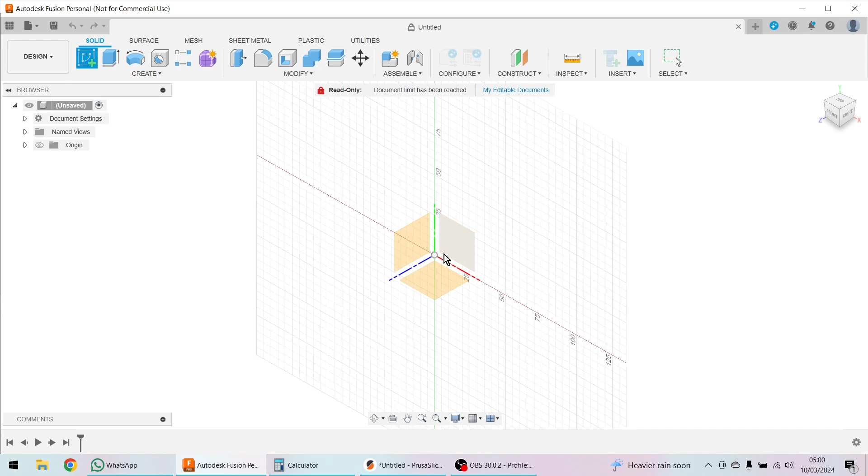Right then, Chris, so you're in Fusion 360 and you're going to create a sketch. I always use this one, personal preference. You can use the others, and if you choose a different one than this, it'll actually be the right way up when you put it on the bed of the slicer without reorientating. But it's all a learning curve, so we'll do this and reorientate it on the PrusaSlicer also. I'm going to click here.

For those watching who don't know, he's got a pipe coming along in this direction which he needs to slide into his part, and he's got a wire tie for activating the guns coming through here. What he needs to do is create an arc here, so the wire tie follows the arc when it's being pushed by a servo over here.

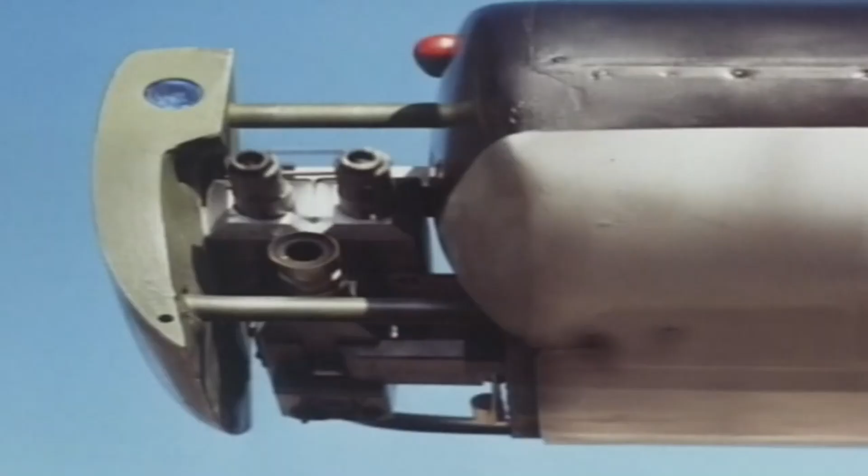So without further ado, let's go here, and we're going to create, just using arbitrary values here, guys, because we don't know the exact size of the part, and this is a learning curve. I want Chris to measure everything up and make these bits perfect. So we're going to go for 50, an arbitrary value here.

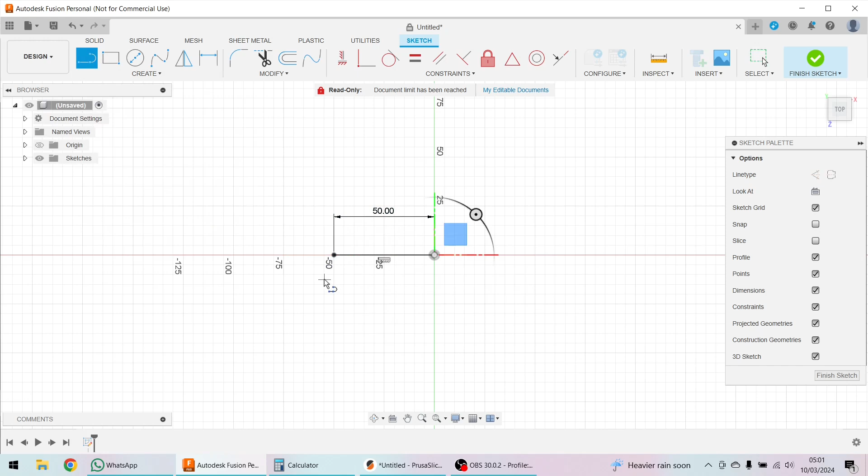I'm going to slide that up here. We're going to click on this bit now, and the pipe's coming here, and I know it's around about, let's say, a 10mm pipe. So I need at least 12mm coming down here, so I've got a millimeter on each side of the pipe, which is going to be pushed through here or down here to an end stop.

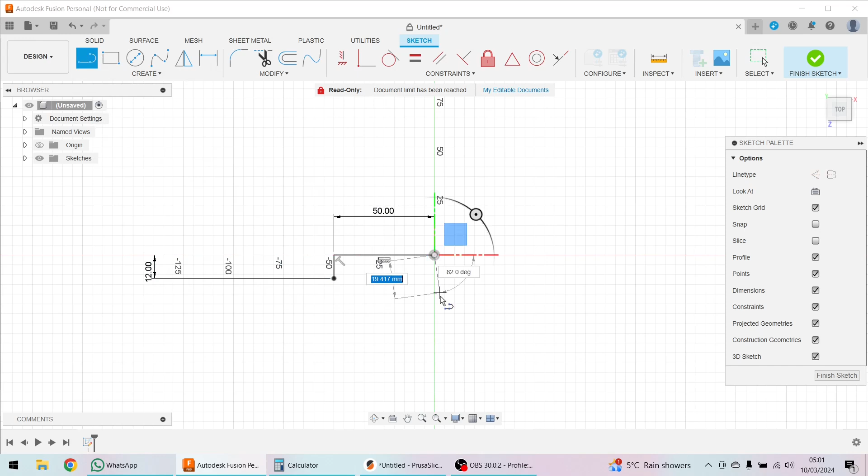Now this bit needs to be a curve. I'll just drag that out of the way so we can see it. If I press the line again, up here, over here, and down here, let's say this is going to be 45. I'm going to type 45 and press enter. Drag this out here so it's out of the way.

Now we're going to put a little bit of an arbitrary value in here. Let's say we need to raise it out by 5mm. Hit 5, press enter. Drag that out there so we can see what we're doing.

Now we need to create an arc here for the wire tie to be pushed around. So let's create an arc, and we'll use a 3-point arc here. We'll put our first cursor here, click, and click here, and then we will make our arc. Let's say we want it to be slightly offset over here like this. We'll click there and we've got an arc.

Now notice I'm going to press the escape key here. Notice how this is a blue line, which means unconstrained - it doesn't know the value of the arc. So I'm going to press D for dimensions.

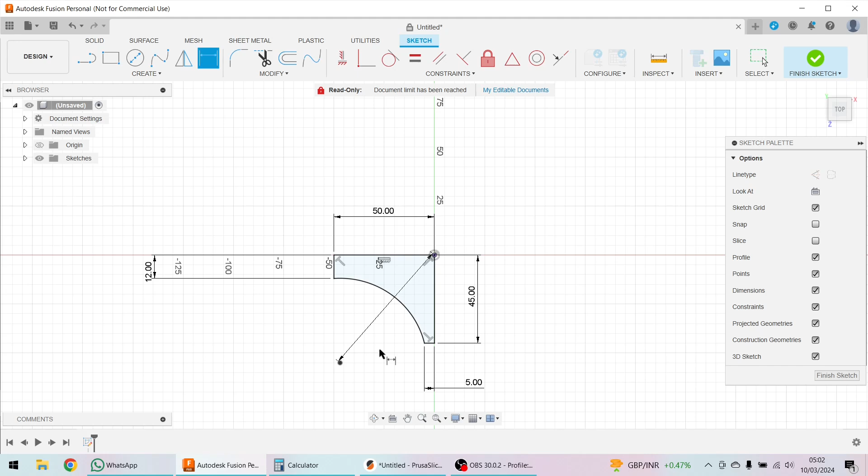I'm going to click on this dot here, and click on this dot here. I'm going to put a dimension in there, and I'll call it 72. Hit enter. Now notice we don't really know what this arc should be, because at the moment there's no arc there, and as the wire tie pushes along this, it sometimes wants to go down here and get stuck.

So the idea of this part is something to guide the wire tie round, and the Airwolf guns come out down here. So the servo pushes the wire tie down here, which pushes the guns out down into this direction.

So that's about right. If I press escape to get rid of the dimensions cursor on the screen, I can double click here, and we can just alter that to 70 maybe, and change the orientation of this arc. If we really need to change it completely, we could...

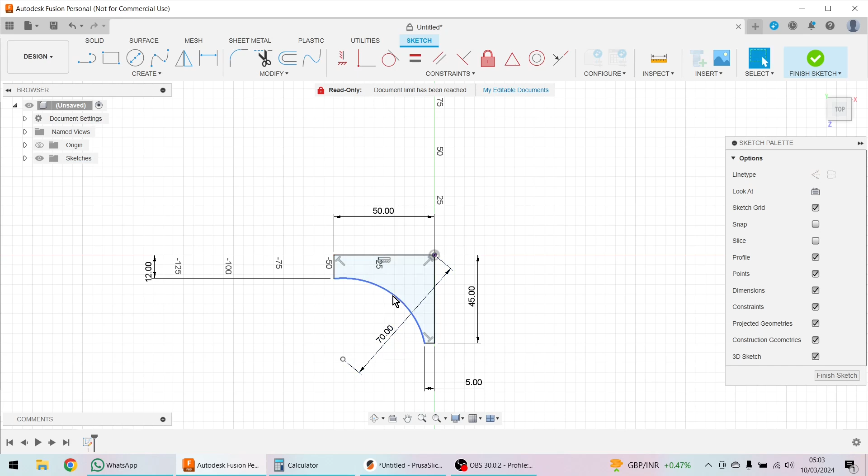Left click there, hit the delete key, and create a new arc. Let's say we put a new arc down here, and we could make it go maybe down more, down this sort of area down here maybe. So it all depends on how you need that arc to be, and that'll be for Chris to play about with.

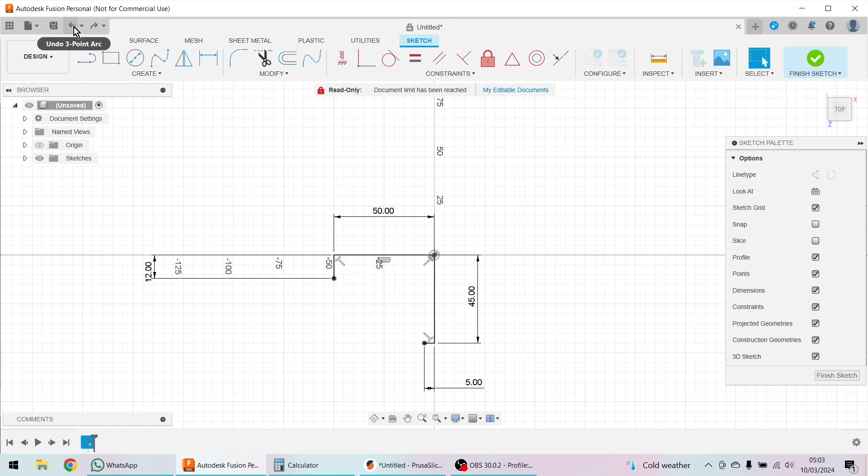For now though, I'm going to press the key backwards, and we're going to go back into here, and let's call it 72. Let's drag that up here out of the way.

Okay, so now we need to get the hole for the pipe. The best way to do that, I think, would be to finish this sketch here, extrude it up. I'm going to make a mistake here on purpose - I'm going to just make it 7.

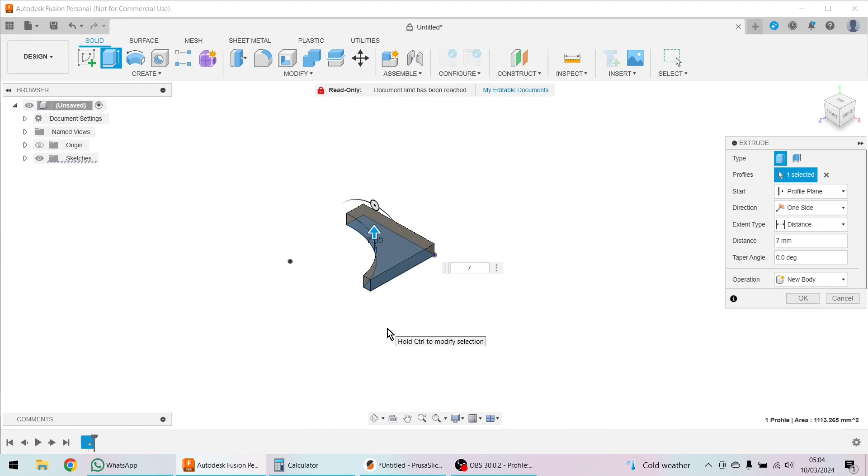Press the E key to extrude, and you've got the extrusion here. Let me go back and do that again - did it a little fast because I'm used to it. I clicked in the circle here, right click, extrude, hit 7, enter.

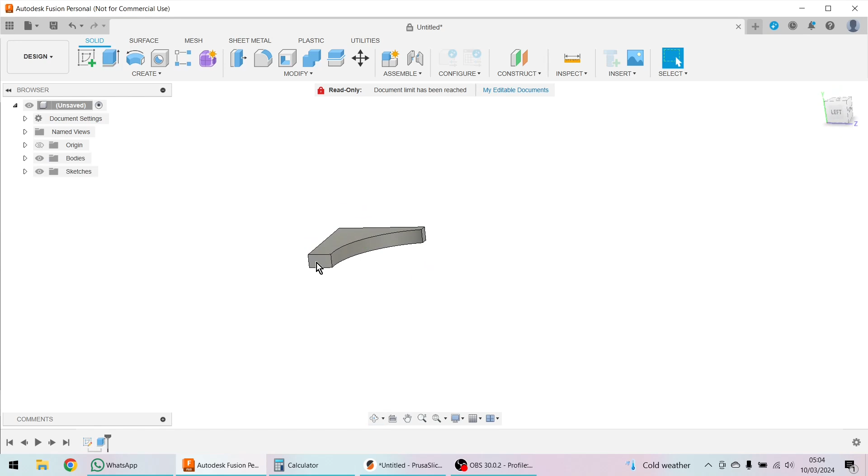I'm going to turn this around and put a new sketch on here. I'll click the sketch, click it here - I want to draw a sketch on there. Now I need to get my 10mm pipe through, so I'll put my circle somewhere in the middle. 10mm - oh dear, didn't quite make that thick enough or tall enough. So I'm going to finish the sketch.

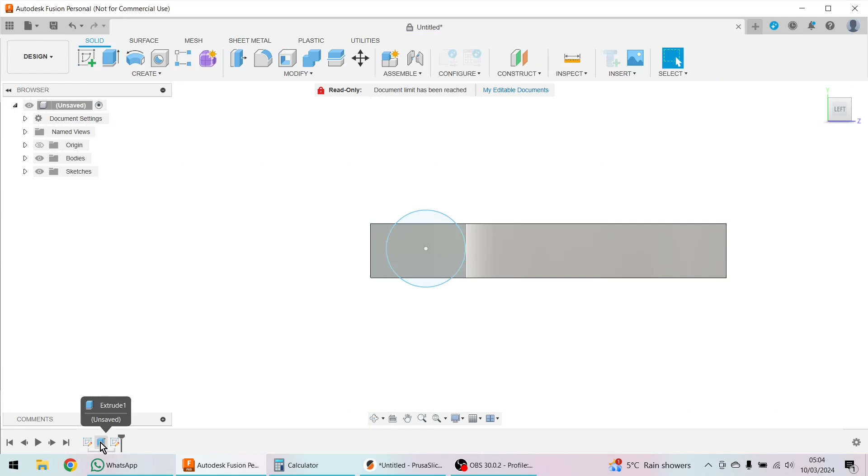I'm going to go back here, right click, and edit this profile, and just alter that to 12.

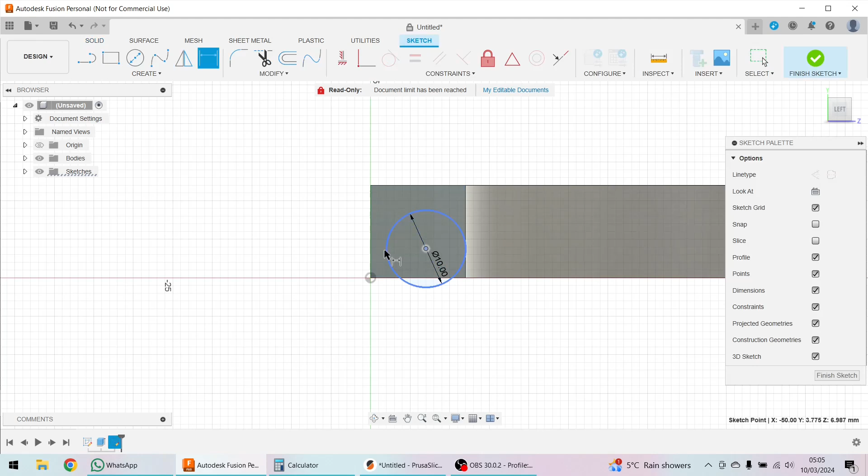Perfect. Now I need to position this circle in the middle, so I'll press my D button for dimensions. Actually, I need to edit the sketch first - edit this second sketch here. Press the D button. If I click in the dot there and on the edge, I can go 6. And if I click the dot and this bottom bit here, I can go 6, which puts that right bang in the middle. It's gone a black circle - it's been constrained to where it needs to be.

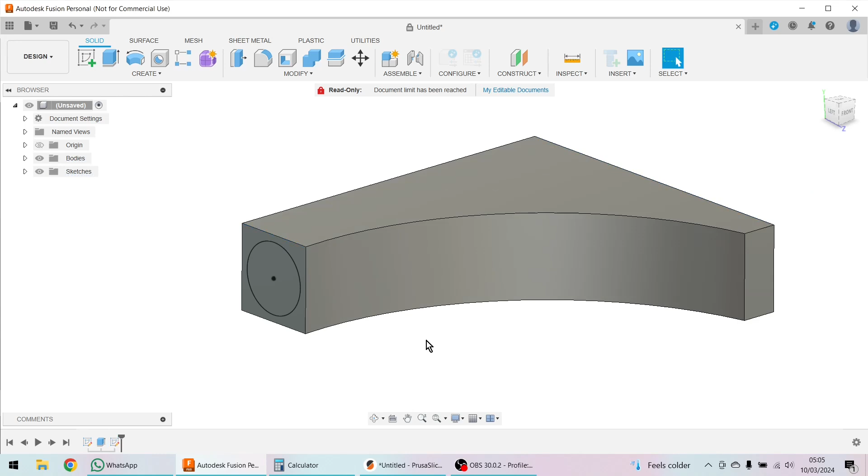Now I can't remember how far that was down there, so I'm going to click on the inspection tool, click this line here and that line there, and it's 50mm. Great, click close. So I know I can go down, extrude -48, and that means it won't quite come out the bottom. It'll give something for the bar to slot into.

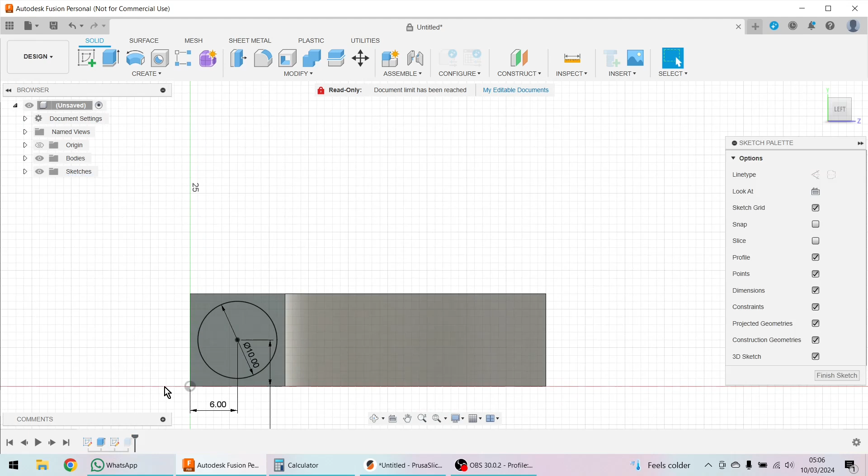Just thinking about something here - it's a 10mm bar, so I need to give it a little bit of extra play to get the 10mm bar down. So I'm going to make this 10.2 probably, and that's a case of printing and almost trial and error with that bar. But on my printer, I'd probably expect that to be quite a tight fit down there.

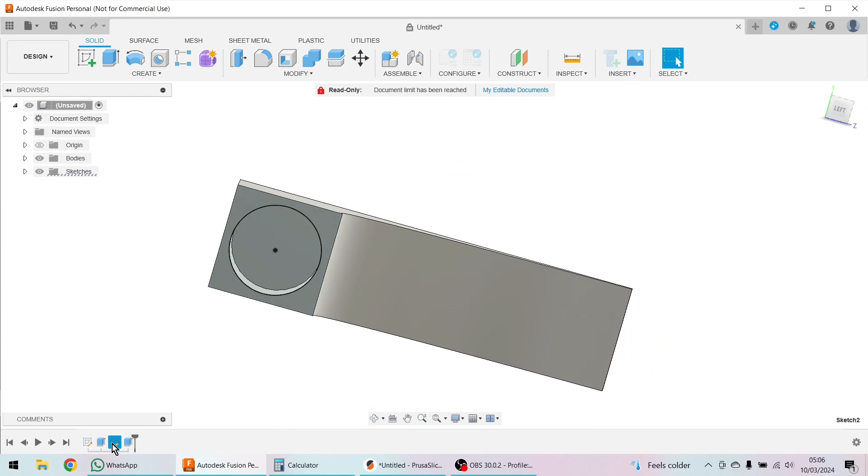Finish that sketch. Now I know he wants a hole in the bottom, so let's edit this sketch again for a screw. We'll do 2.1 maybe for a 2mm bolt to go down there.

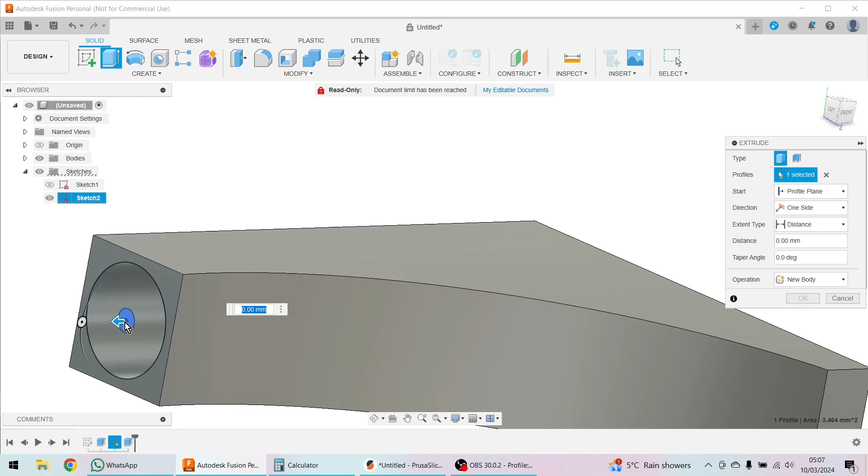We finished the sketch and it disappeared, so I'll open this up so I can switch the sketch back on, because I need to get this bit here, extrude, and this time it needs to go all the way out the back, so 60mm. That's great, so now I've got the hole at the bottom. And turn this sketch off here.

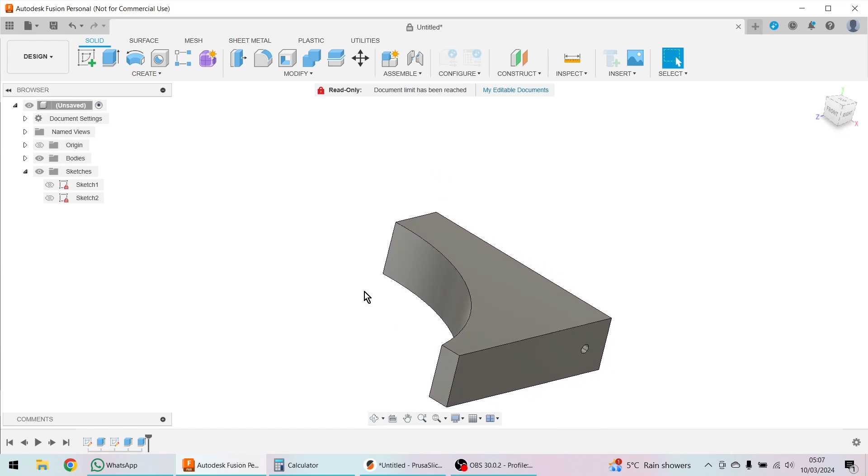That's looking pretty good. That's almost what he wants, but I'm thinking we'd really want some guide holes here, like a guideline to take the wire tie along this edge. So let's think about that - let's say the wire tie is 5mm, and I know this is 12mm between here, so I want a 3.5mm thick guideline here and a 3.5mm thick guideline here.

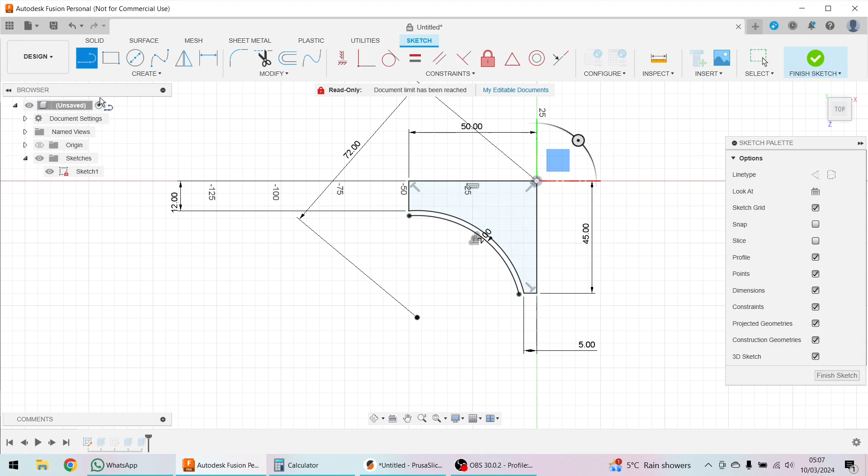So let's go back to this original sketch here and edit sketch. Now I'm going to press the O key for offset. I'll click on this line, press the O key, offset, and let's say we want that to come out -2mm. I can now click on the line, zoom in, and join that up like this.

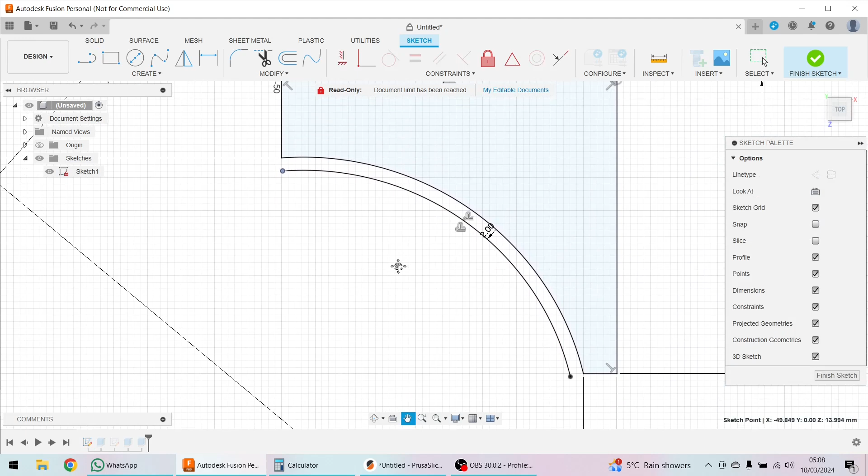We're slightly off here, aren't we? So let's fix that - let's click on here and delete that line. Let's see if we could extend that slightly, I think. No, you know what, it's not going to really make much difference in this part.

No, it's not really going to make much difference in this part, so we're actually going to join that back. But on this part, I don't really want it coming off beyond this edge, so I'm not going to join it to the dot. I'm going to zoom in a bit and click it to about there. There you go - now it's disappeared.

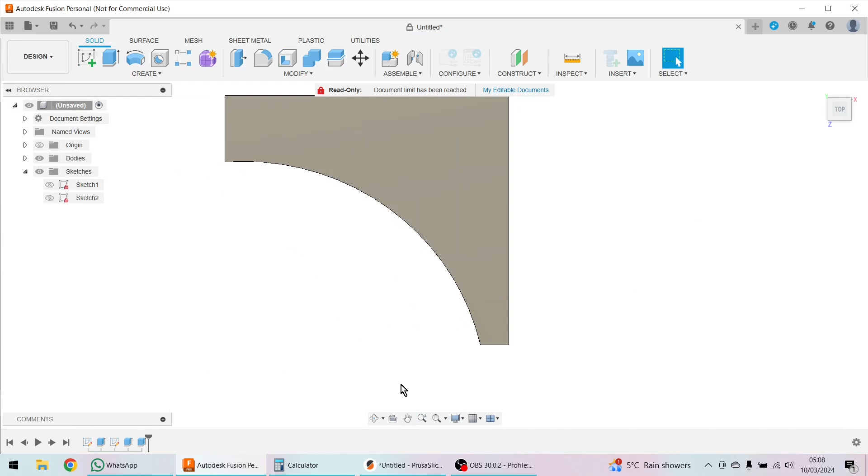We're going to switch this sketch back on. Now we're going to click here, right click and extrude - we know we can go up to 12. Okay, now bear with me, I'm going to flip it over.

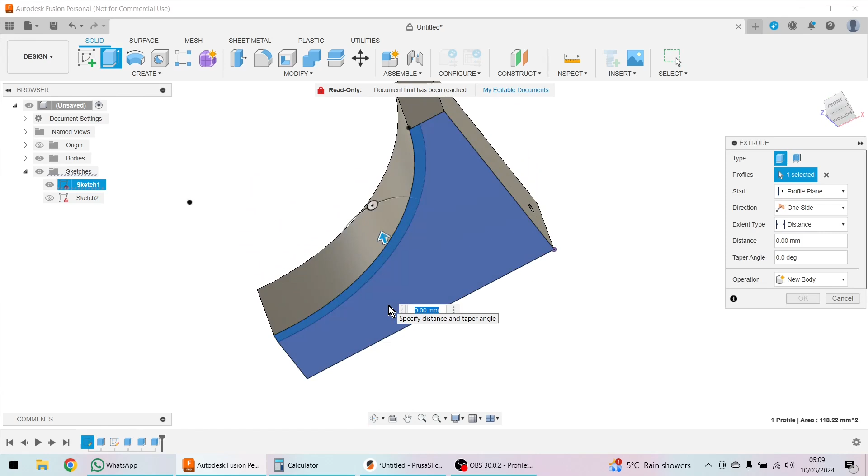I'm going to click here and extrude. 12 minus 3.5 is 8.5, so I'm going to go 8.5 - notice how it cuts now through into that part.

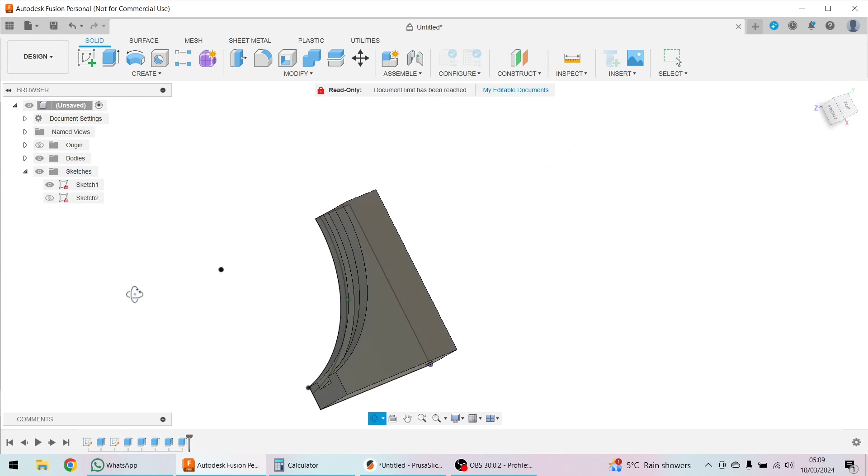Click OK. And now I'm going to right click again and select 3.5. There you go - now I've got a nice little channel for the wire tie to push around, and a nice little bit there for the bar. Now let's get rid of that sketch mark there because we don't want that.

Okay, let's put that through onto Prusa. I'm going to click save. Actually, I'm going to have to clear some documents down, so I won't bother clicking save because I'm in the personal use license here. So save as mesh.

Save as mesh, this is good settings. We've got STL binary for the printer, medium's fine, millimeters for me here. So click OK.

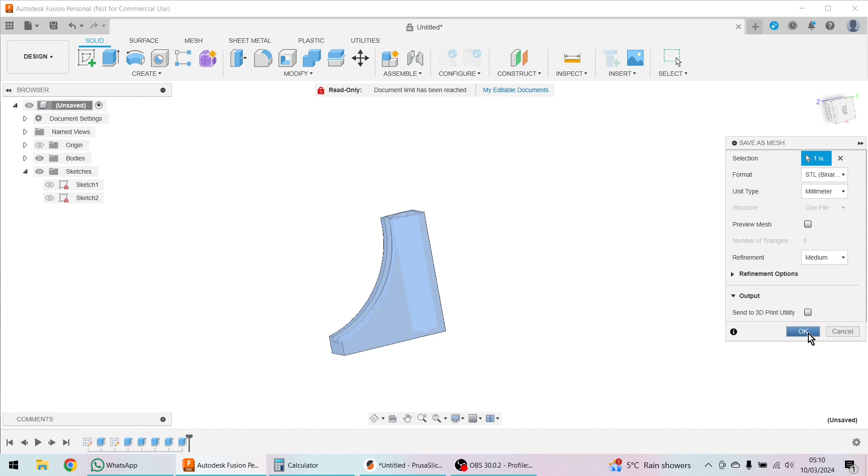We're just going to call it Chris AirWolf test. Save to my computer, obviously, because I need to put it into the slicer. I can stick it in random stuff. That's fantastic. Open the slicer, Prusa slicer here.

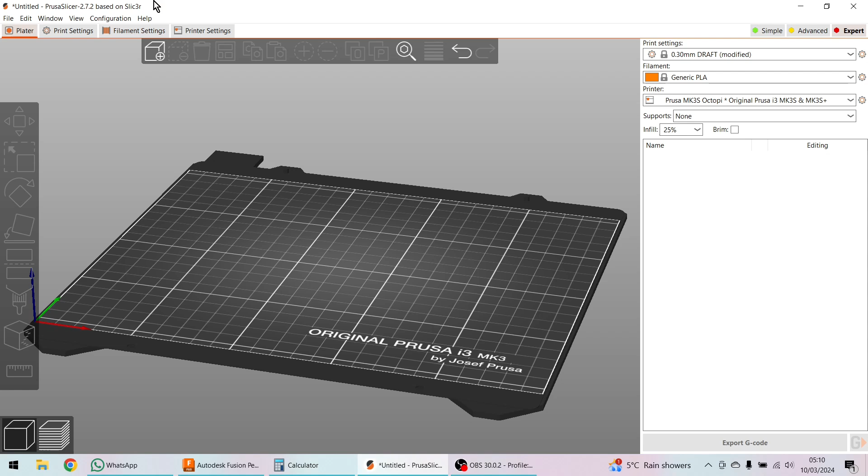Click here, as you can see I've been playing about, but this is the one I've just done. So put it on the board there. I can move it around. We can see that. Now that's not going to print very well.

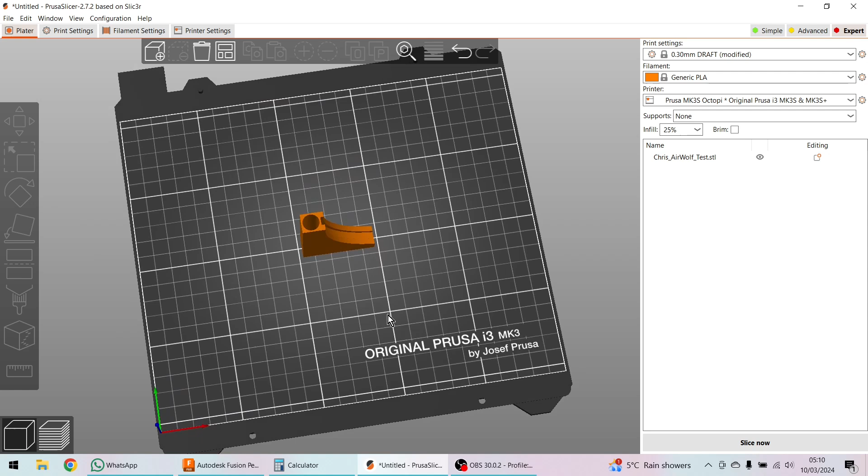Frankly it wants to point upwards, so this is the edge that it needs to print on. I'm going to click this tool here, click that edge there, and it's going to stand up. Now when I look at it, I think we should really make these corners rounded.

Which is fine. So we're going to click the part, remove it from the bed, go back into Fusion. Now we know that circle was created by this sketch, so let's edit that sketch.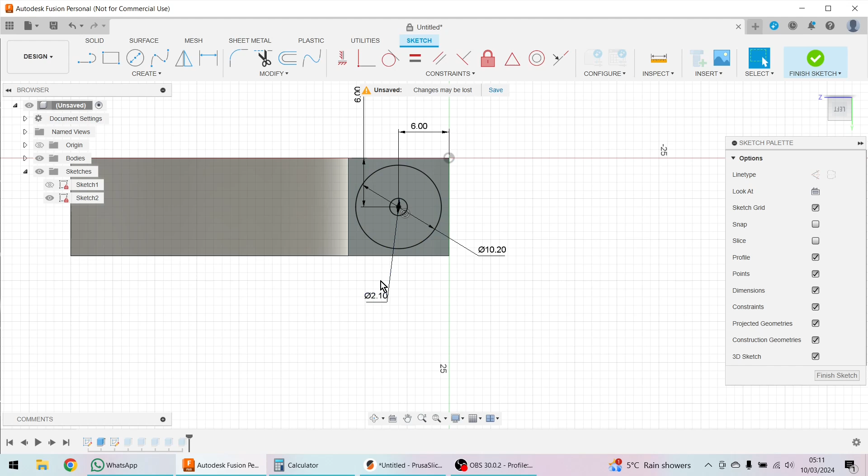Now we know the size of this was 12, so let's put a 12 - and I'm going to do this a bit weird. I'm going to put it here, and I'm going to put 12 here. Okay, and we want to line it up on these edges, so I'm going to use the tangent constraint here.

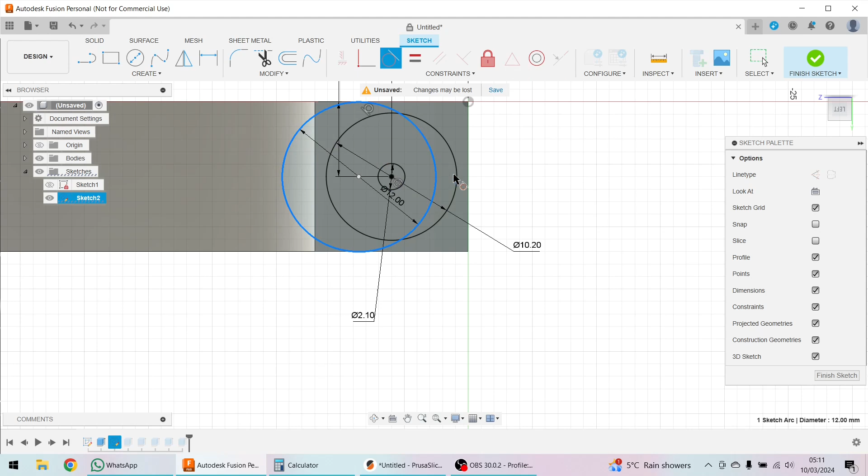I'm going to click the tangent constraint, click this circle here, and say I want you to join that edge to that edge there. Then I'm going to click again the circle here and join that edge there, and that puts it right in the middle of that block.

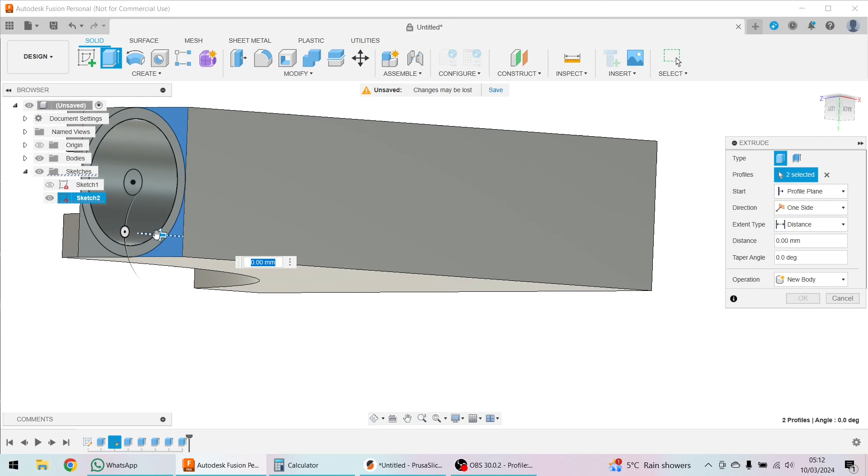Of course, I could have just lined it up and drawn a circle for 12, but it's all about the learning. We can finish the sketch, turn it back on with the eye, click here, control down, click here, right click, extrude, take that down at least by 50 - that's made a better edge there. Let's turn the sketch off so it looks better, and that's it.

So the bar goes down there, the wire tie moves around this way, no problem. Somewhere to screw in at the bottom, 2mm at the bottom, which is what Chris needs. I do remember that bit. So that looks good.

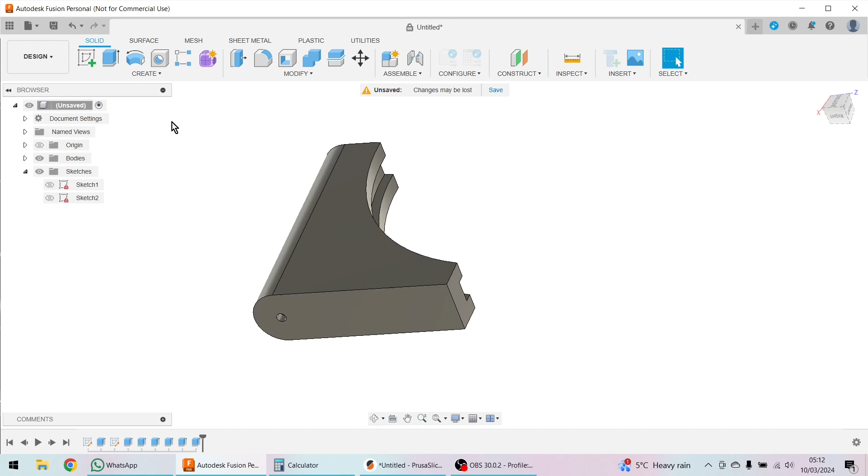Export again, save as mesh. Okay, I have to rename it because of course I've not managed to save it. So Chris Arnold temp v2.

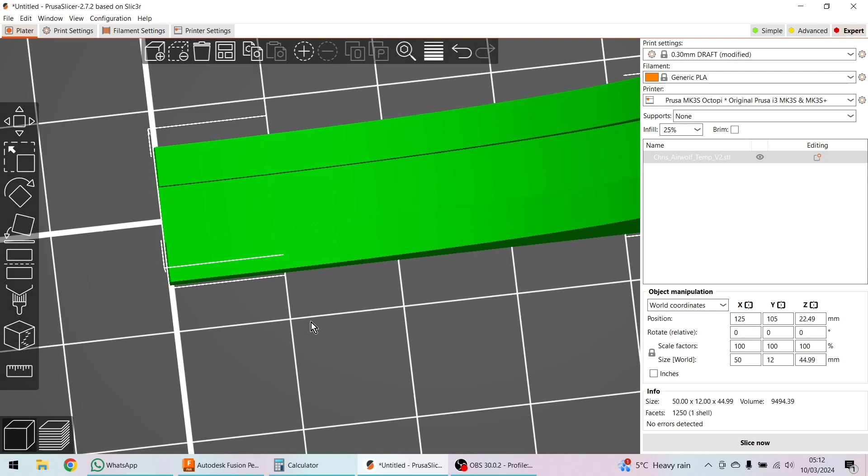Click here, put it into the slicer, and remember I need to change this direction. Click here, click on the foot there, no problem. Slice now, down here, and we're going to use 2.47 meters of filament, and it's going to take about 36 minutes to print, which is about okay.

So I'll set that going, and I'll add a little clip to see what the part looks like when it comes off the printer.